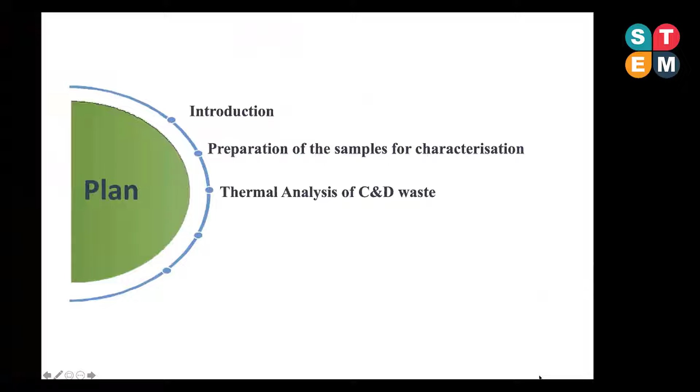So I will start with a question that is the subject of all scientific researchers: is it necessary to control the world's demography to save the planet? Is it really the number of people that is important, or their lifestyle? We will see the answer in the future.

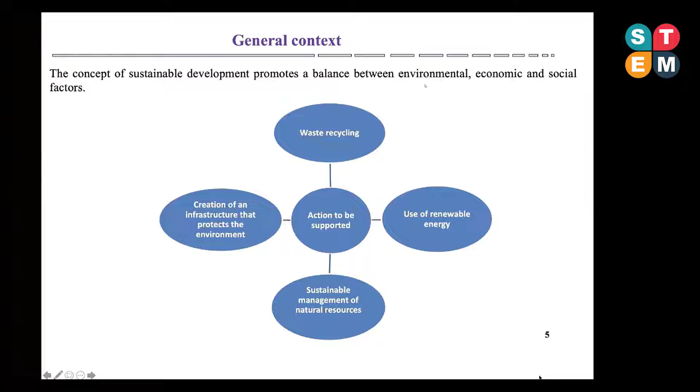To protect the environment, various approaches have been developed: waste recycling, use of renewable energy, sustainable management of natural resources, and creation of infrastructure that protects the environment. Among the approaches just mentioned, the valorization or recycling of waste is the object of our subject today.

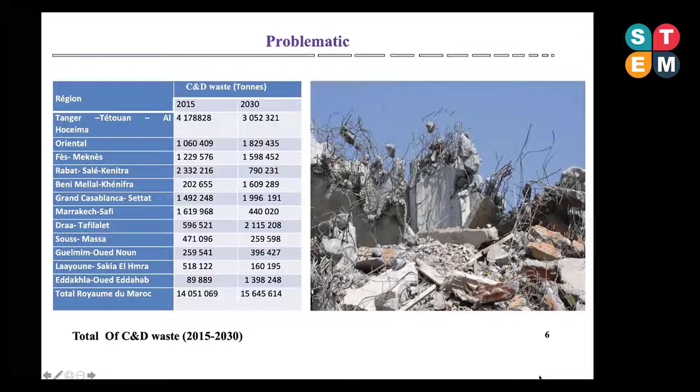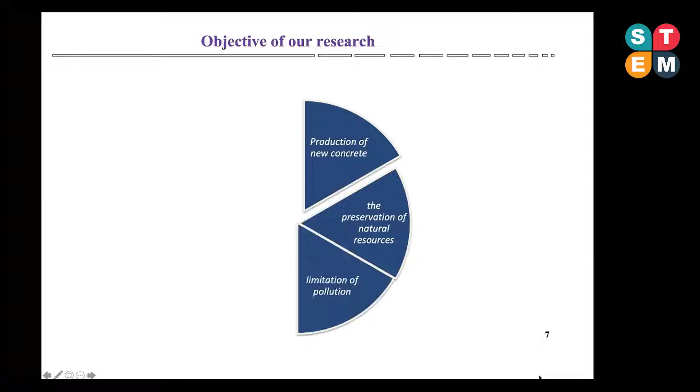This deposit will progress to reach 15.6 million tons by 2030. So if we can recycle and recover this enormous amount of C&D waste for the fabrication of new concrete, or production of new concrete with recycled aggregate from C&D waste, it can contribute to the preservation of natural resources, limitation of pollution, reducing CO2 emissions, and economic energy and improvement of energy efficiency in building.

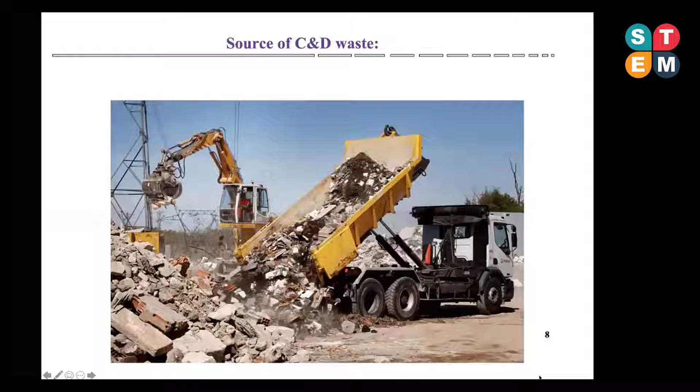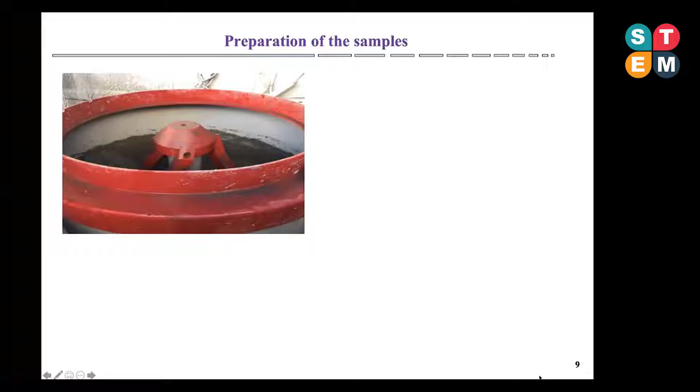So we made a new construction, a new concrete based on the C&D waste. We made three samples of concrete: normal concrete, concrete with 10% of C&D waste, and concrete with 20% of C&D waste.

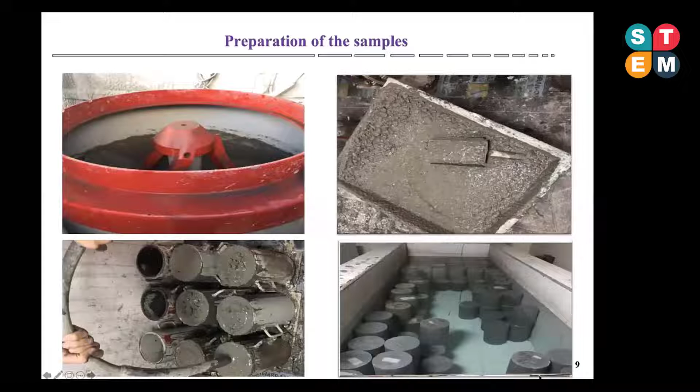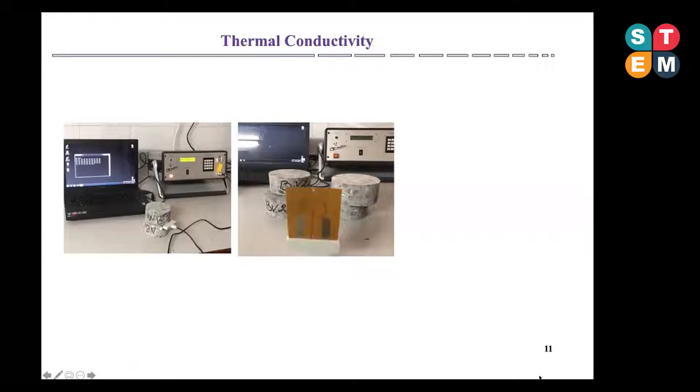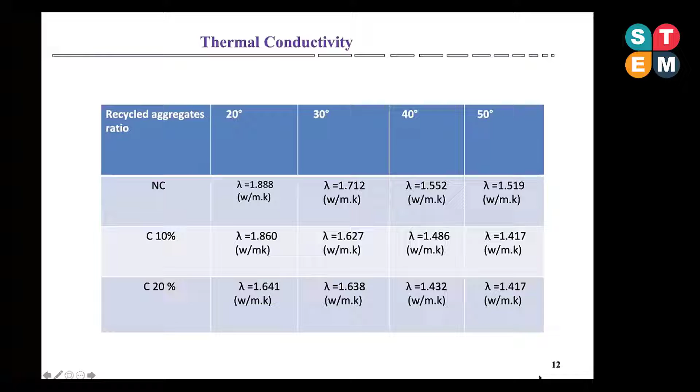A series of thermal conductivity tests has been done for our three samples in our laboratory. We can see the value of thermal conductivity for the three samples. The thermal conductivity decreases for the three samples as the addition of recycled aggregate increases, and also when the temperature is increased. This is the same result for normal concrete, concrete with 10%, and concrete with 20% of C&D waste.

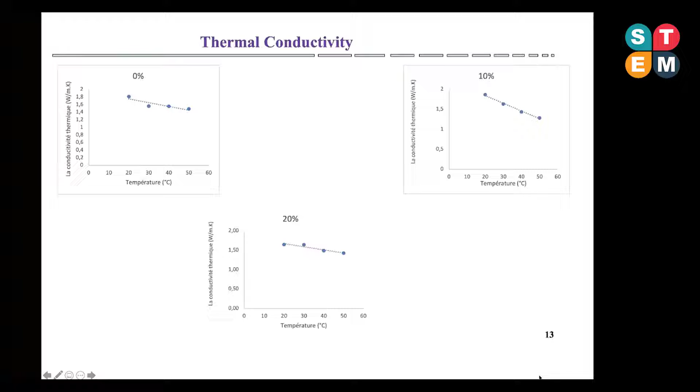For the effect of temperature on the thermal property, we can see that the experimental results for the effect of temperature on the measurement of thermal conductivity, including different temperatures, are presented for the three samples: concrete, normal concrete with 10%, and concrete with 20%.

The temperature during the test increases slowly until its maximum is reached after time, around 430 seconds, after which the temperature decreases. This is the same for the three samples.

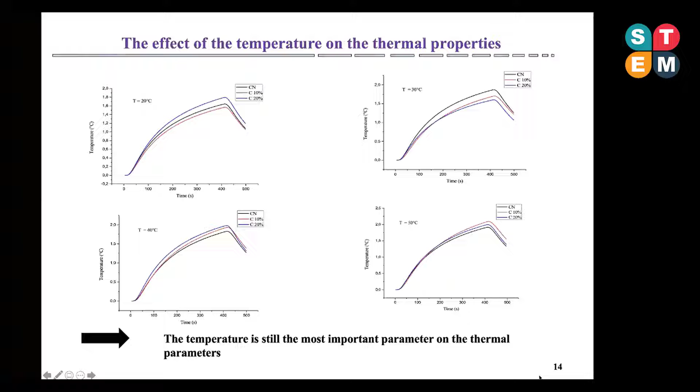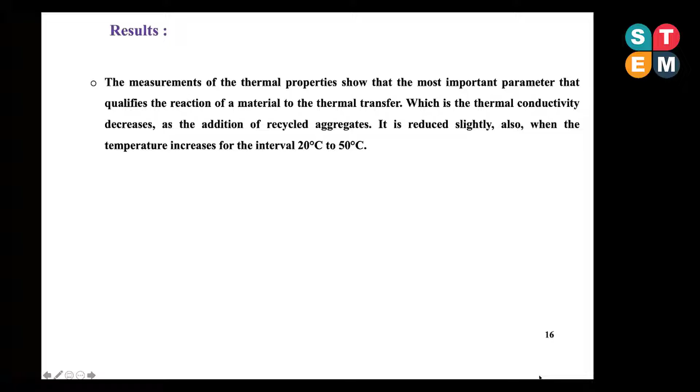So we can see that temperature is still the most important parameter on the thermal conductivity. The measurement of thermal properties shows that the most important parameter that qualifies the reaction of a material to thermal transfer, which is thermal conductivity, decreases with the addition of recycled aggregate. It reduces slightly also when the temperature increases, for the interval between 20 to 50 degrees.

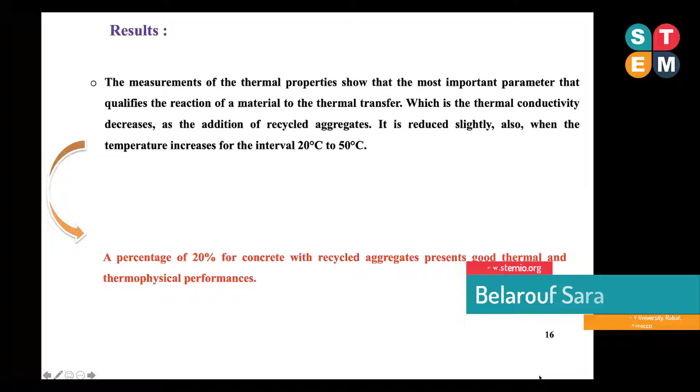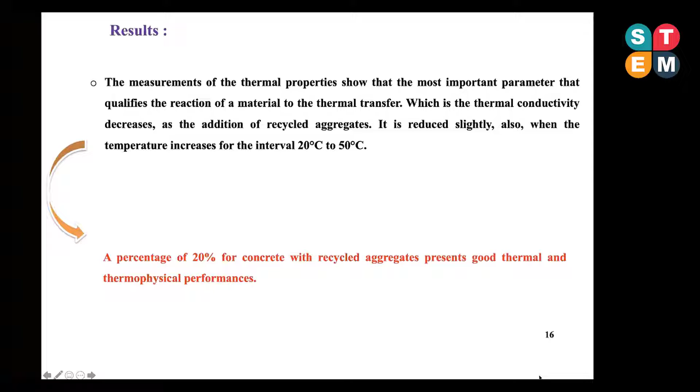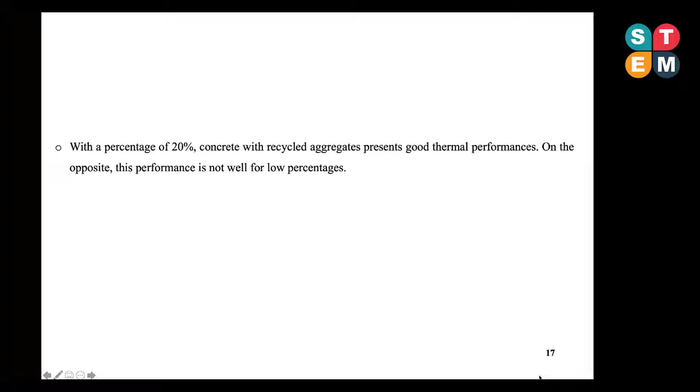Up to 20%, concrete with recycled aggregate presents a good thermal and thermophysical performance. With a percentage of 20%, concrete with recycled aggregate presents a good thermal performance. On the opposite, the performance is not as good for a low percentage, so 10% and normal concrete.

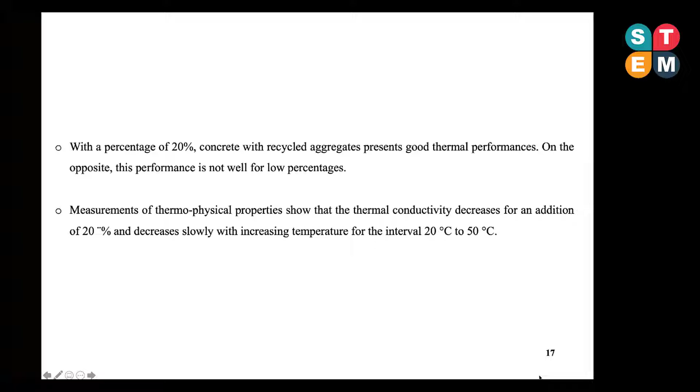Measurement of thermophysical properties shows that thermal conductivity decreases for an addition of 20%, and decreases slowly with increasing temperature for the interval between 20 to 50 degrees Celsius.

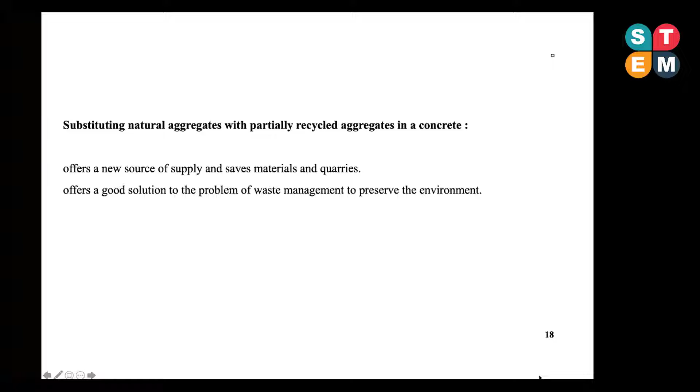So to conclude, we can see that substituting natural aggregate with partly recycled aggregate in concrete can offer a new source of supply and save materials and quarries, offering a good solution to the problem of waste management to preserve the environment. Thank you for your attention.